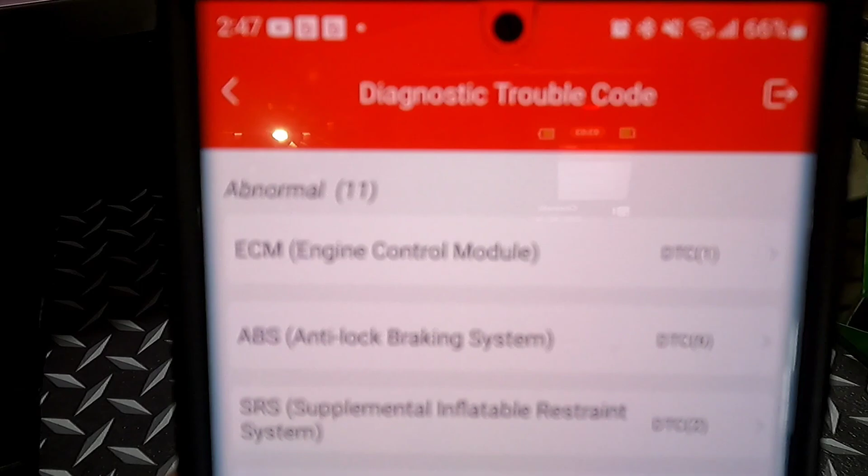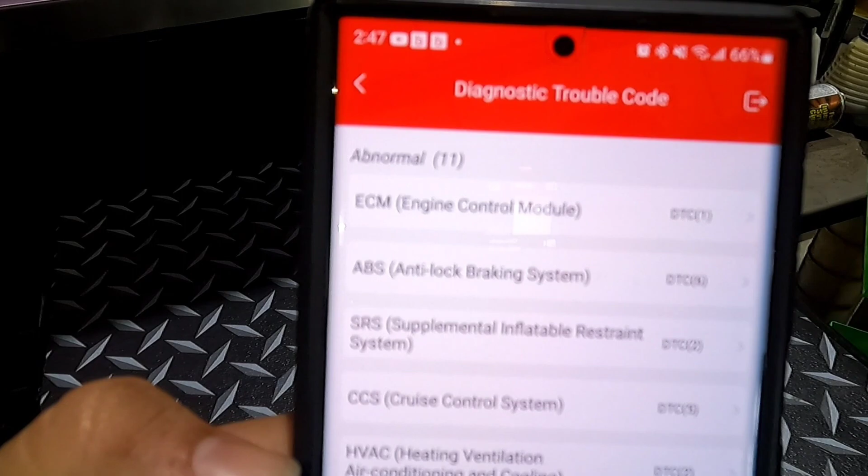So as you can see right here, we have 11 abnormal faults: 1 in ECM, 6 in ABS. I don't know how well y'all can see that. 2 in SRS, 5 in cruise control, HVAC has 2, multi-AV. And I do know a lot of these are like battery issue codes.

So we're gonna click on ECM because remember we do have that check engine light. I don't know what those are. Let's see, 267, 1123, I have no idea. Now it's communicating with the vehicle.

Now here we can do module information, which if you click on that, it'll tell you the part number of the module and the software. Read fault code: we got a P0015, which is camshaft position bank 1, which is going to be exhaust.

Now if we go to freeze frame, it'll show you the freeze frame, show you the data stream name, or it shows you the PID actually, and then coolant temp, long-term fuel trims. It gives you a lot of information.

Click on the question mark and it'll give you a rundown of how to fix it, what we're actually looking at, how to come up with it - how to fix Nissan P0015 engine code in 4 minutes, which that's showing the VVT solenoid.

Go back, we can read data streams, go to main signals, and I want to pick out the main signals I want to look at. So I want engine speed, exhaust valve timing, intake valve solenoid - where's my exhaust valve? Oh, exhaust valve timing, intake. There's another one, duty? Does it not show me that? Battery voltage closed, injection pulse load signal. Okay, we're gonna just look at those.

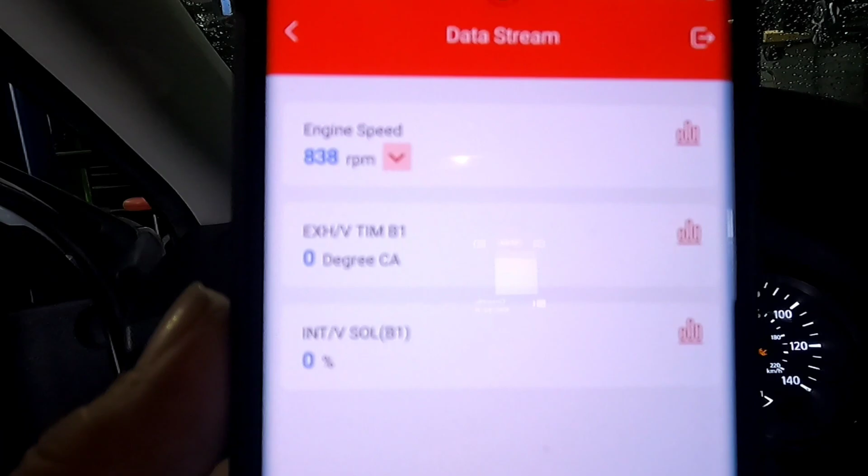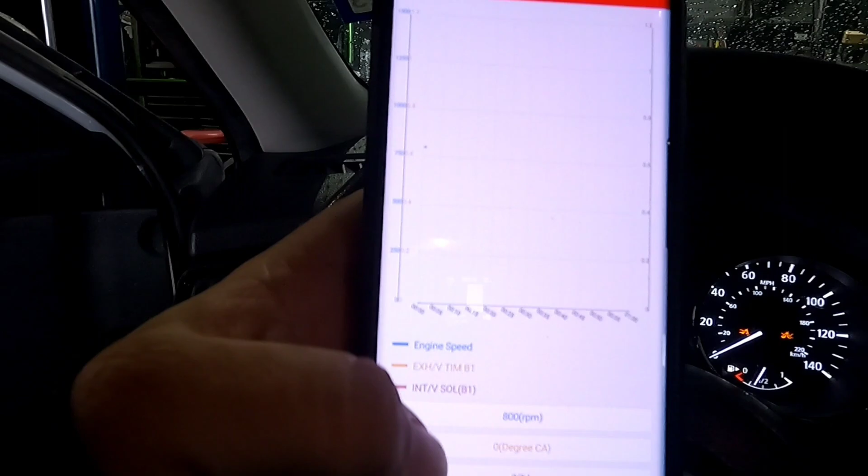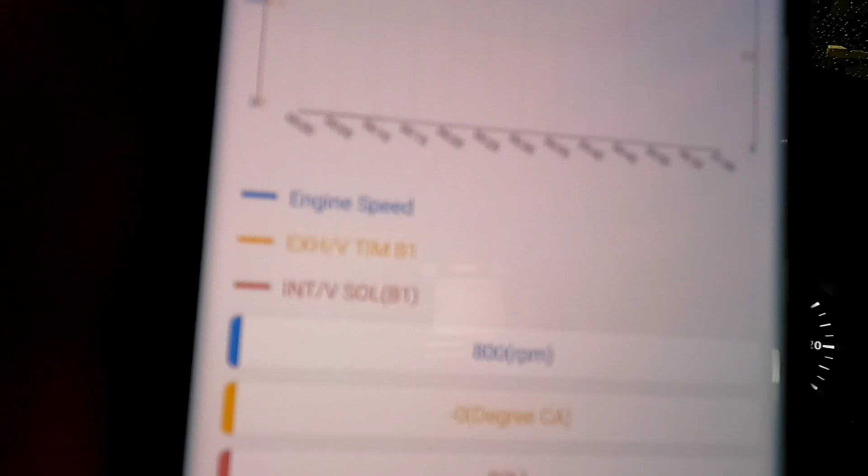One thing I do want to show y'all: combine down here, and we will select all 3, hit OK. Now it's going to give us a graph. Y'all see that? It gives us different colors down here, tells us what those actually are, and then - oh, we have, it's hard to see, man.

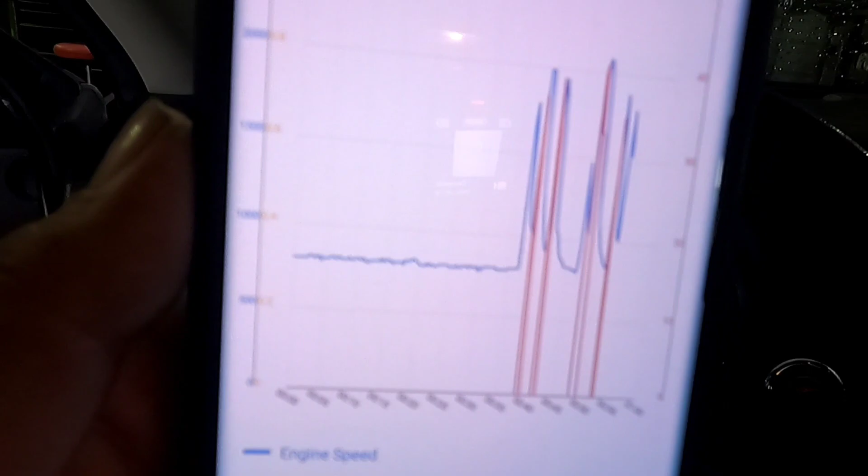Focus. One thing about using this GoPro, it's a little difficult. But RPM's going up, and then you saw that red line. That red line is going to be the intake valve solenoid. So y'all can see the actual numbers right there. So we are responding on intake. We don't have no response on exhaust.

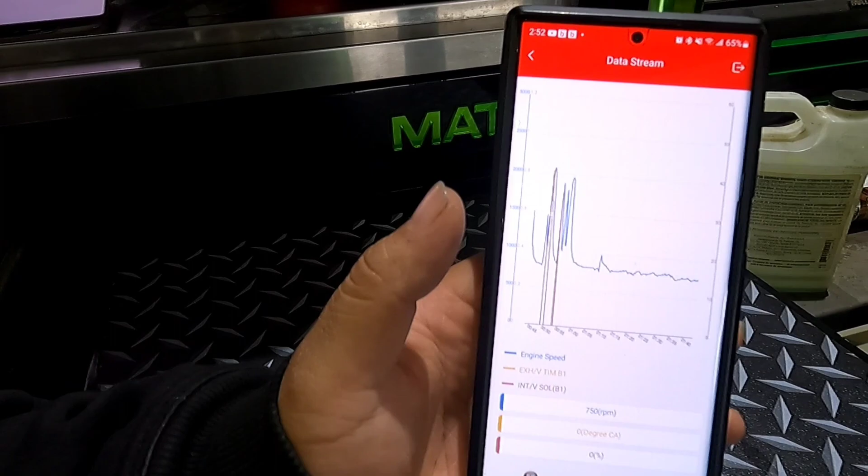Now remember, this is not a diagnosing video. This is simply a video to show how this thing works and the functions and the abilities of it. So let's back out some more.

Oh, that's what I was supposed to do. I was supposed to do all signals, I don't know why I went main signals. You do all signals, so we'd get oil pressure, okay? Oil pressure sensor, exhaust valve timing, intake valve solenoid, intake valve timing. Was there an exhaust valve solenoid? No, there's not.

Why? Purge solenoid. So these are all the different PIDs we can actually look at. Oh, there it is - VTC duty exhaust bank 1. So this will be exhaust valve timing, so we want to look at that. Is the computer telling it to actuate? So one time for the one time - so we are getting the ECM to command the VTC duty exhaust, which is going to be that one right there. We are getting it to want it. It wants it.

Now if we do the graphing, green is valve variable timing control duty exhaust bank 1. It wants it, but it's not getting it. We should be getting yellow on the graph, but we're not. We're getting everything else except that.

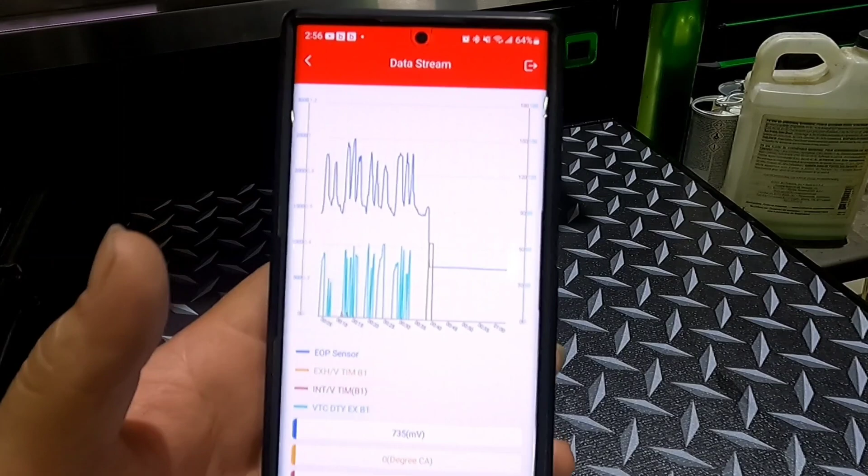As y'all can see, the blue one is the engine oil pressure, and we got adequate pressure. Well, I'm saying adequate because we're seeing some movement on it. Again, this isn't a diagnosis video, just simply showing this scanner.

What else do we got? Let's do function test. Car, computer, no, that's not what I want to do. Actuation test, so we got different functions we can do. Fan duty, monitoring data. We can do engine coolant temp sensors. Now y'all don't hear no fans in the background, right?

Let's do quick up. Oh, can y'all hear it in the background? We're at 100% duty cycle. I don't know if y'all can hear it, but we do have fans going.

Back out, fans turn off. Vent control valve, intake valve timing, exhaust valve timing angle. We can do fuel injection.

What's another one? Special functions. Okay, we can do idle air volume relearn, automatic matching or manual, we can set it manually. VIN registration, target idle, fuel pressure, close throttle position, self-learning. Sorry guys, I had a call. And we can do misfires.

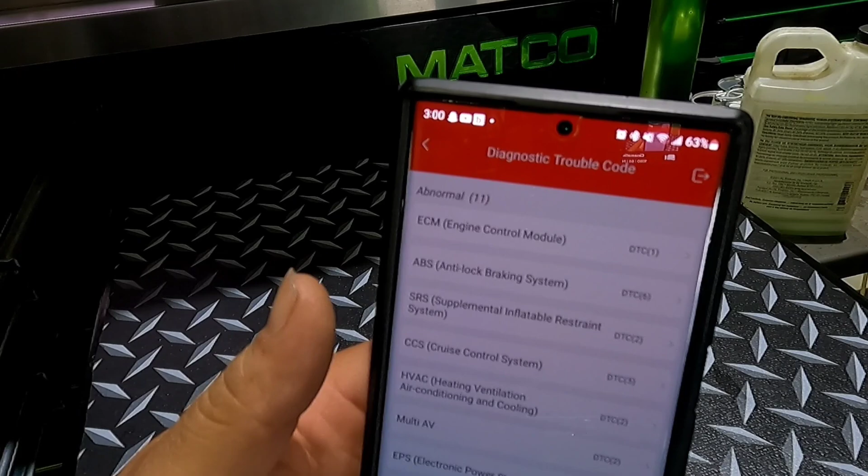Oh, it's on that, I'm sorry, I had clicked on the wrong thing. But yeah, okay, let's just look at the codes. CCS, well, we call it ICC.

Okay, so I want to focus on my current code. We can read data stream, select from menu, go to steering angle, hit OK. Y'all see that? 341 degrees out of center, and the wheels are straight.

Going back to the menu, we can do actuation test. Is that actuation? We can activate all these different ABS motor, ABS solenoids, and stuff like that.

Function test, car computer, I don't know what the hell that is. Special function, oh, this vehicle can't support it. Okay, well, that's another thing that I found out. So we can normally relearn the steering angle sensor.